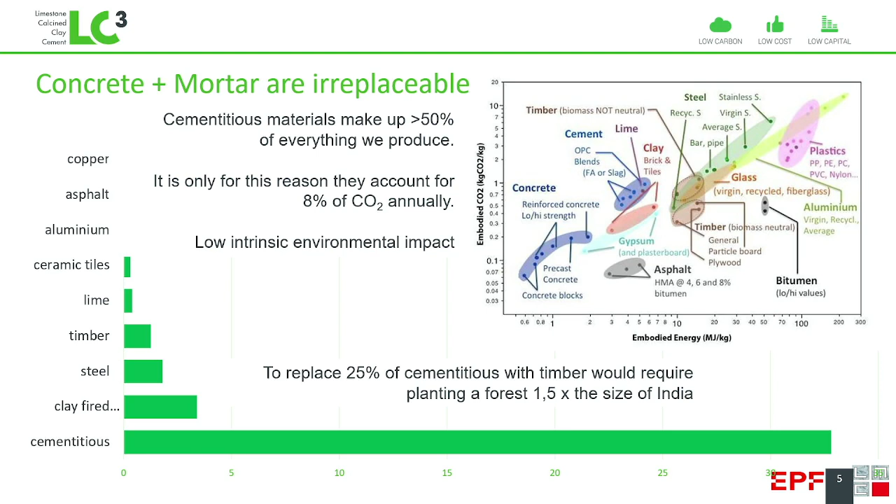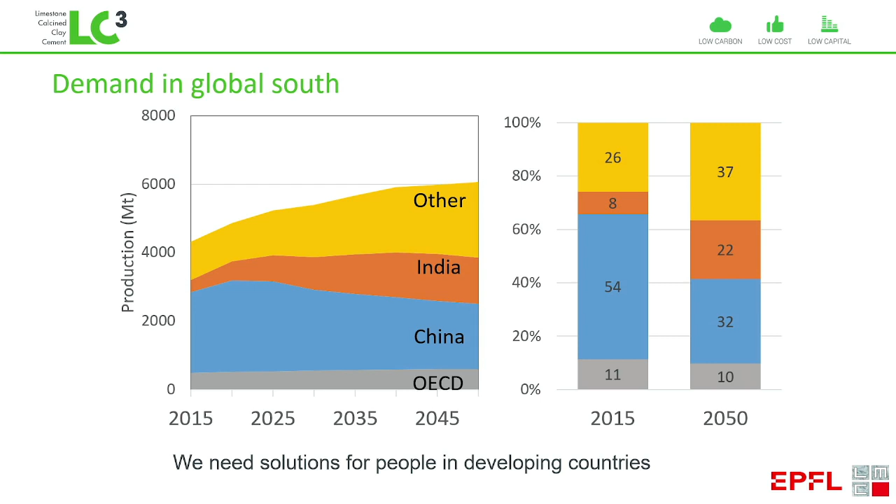Is where the demand for cement is going to be in the coming years, that this is going to be overwhelmingly in the global south. This means that we must have solutions that can be used by everybody everywhere, and not solutions that are very sophisticated that become a micro niche.

The other issue we are facing with cement is the origin of the CO2 emissions, which are coming from more than half of the emissions, about 60%, coming from this simple chemical equation, which is the breakdown of limestone, 80% of the raw material, into calcium oxide and CO2.

Now, this material we call Portland cement. We cannot really come with alternatives because the chemistry and geology of the earth means it's the only material we can produce on the scale needed.

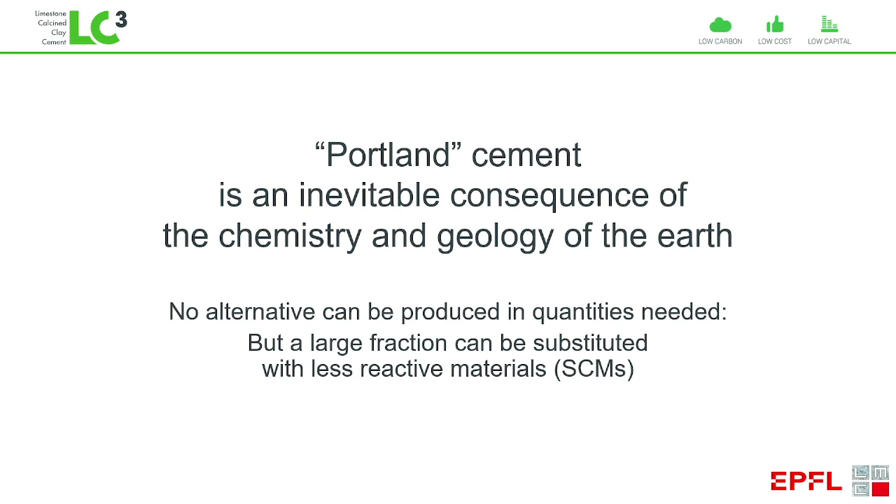But we can replace a large fraction of this Portland cement by other materials, and this has been done very successfully over a few decades now. But the issue is that the materials we are commonly using as replacements, which are called slag and fly ash, the amounts available are really quite limited compared to the demand for Portland cement. And these materials' amounts will decrease in the future because they're coming from very CO2 intensive industries.

So this is where we started from, and we looked at what materials we could use as alternatives. Limestone is widely available, but the problem is it has low reactivity. And then we came to the clays. Clays can produce very reactive materials when they're what's called calcined, meaning heated in the range of about 800 degrees.

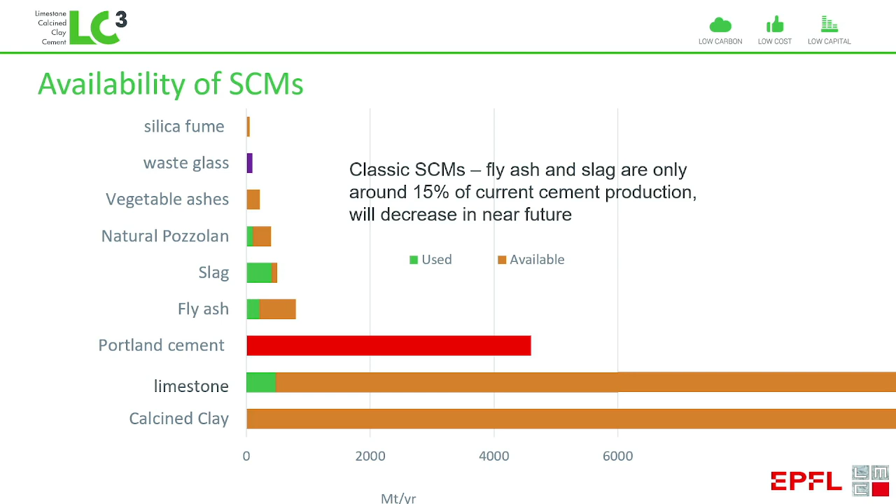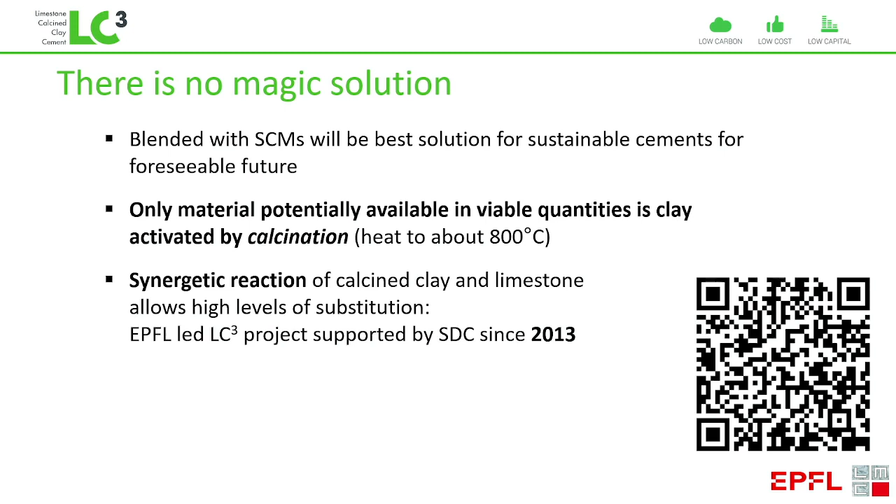So in a nutshell, blended cements will be the most viable option for the future, and the only material which can extend this use of blended cement is calcined clay. Our discovery at EPFL was that we could have a synergistic reaction between limestone and calcined clay, which allows us to go to very high levels of substitution. We discovered this about 2008, and since 2013 we have been supported by the Swiss government through their Agency for Development and Cooperation to bring this technology to the industry.

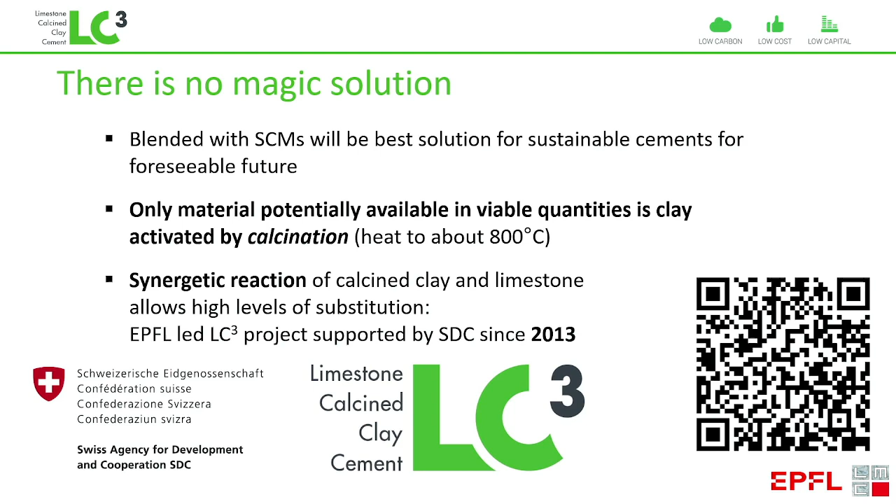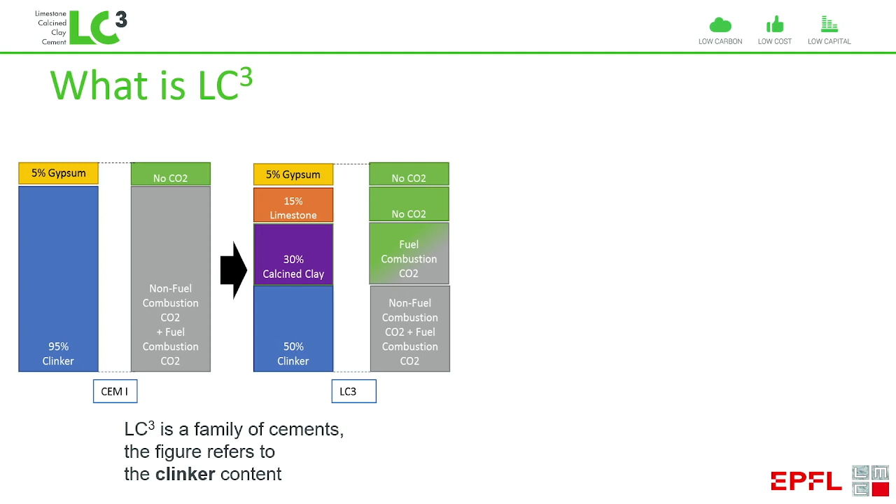So in a nutshell, this is why we can reduce CO2. On the left there, we have conventional clinker, which is producing a lot of CO2. In LC3, we can replace at least 50% of that clinker by other materials. We replace about 30% with calcined clay, which has a little bit of energy for calcination, but much, much lower than clinker. And then the other part by limestone and gypsum, which have no CO2.

And what's really interesting is the fact that with this material, we can obtain the same or higher strength than the reference Portland cement in as little as 7 days. So in a nutshell, we have 50% less clinker, 40% less CO2, and some properties like resistance to chloride ingress and alkali silica are immensely improved.

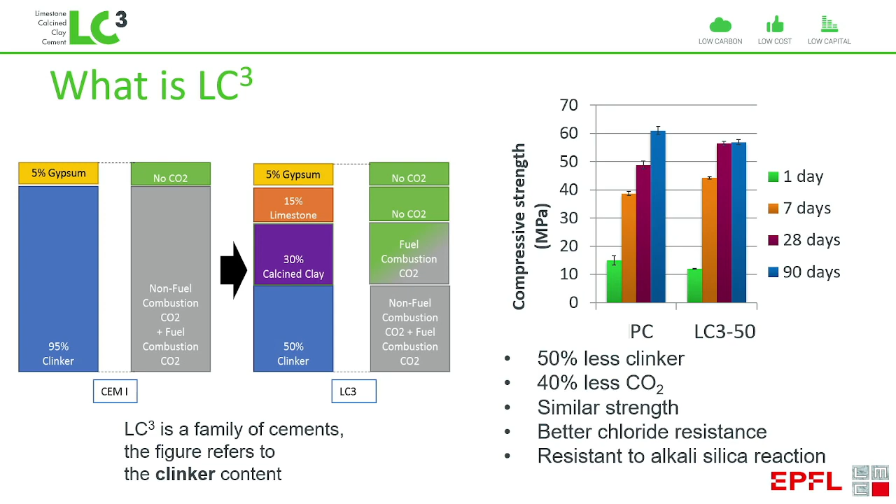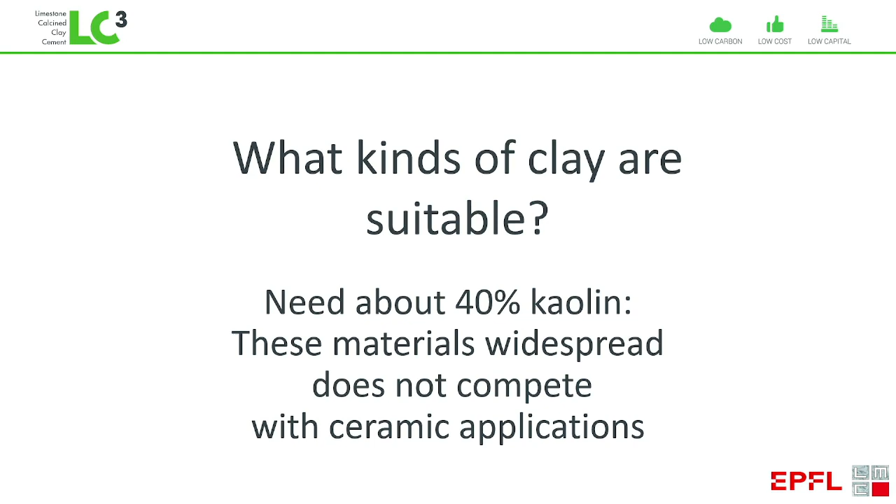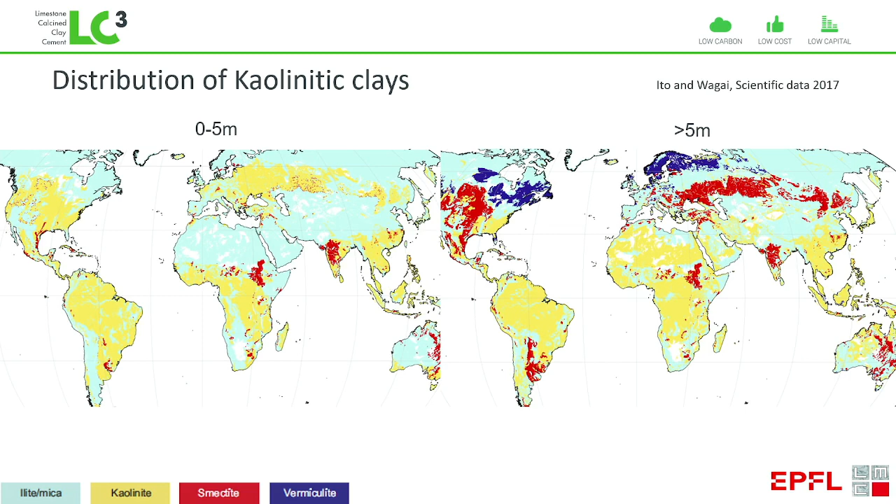So our first issue was to find the right kind of clay. We don't need very high purity materials. We can use materials with just around 40% kaolin, and these materials are very widely distributed worldwide. Everywhere you can see this kind of yellow color, you will have suitable materials for making this calcined clay. This is particularly good in the developing countries where the demand will be strongest in the coming decades, but also in Europe we have some quite good areas.

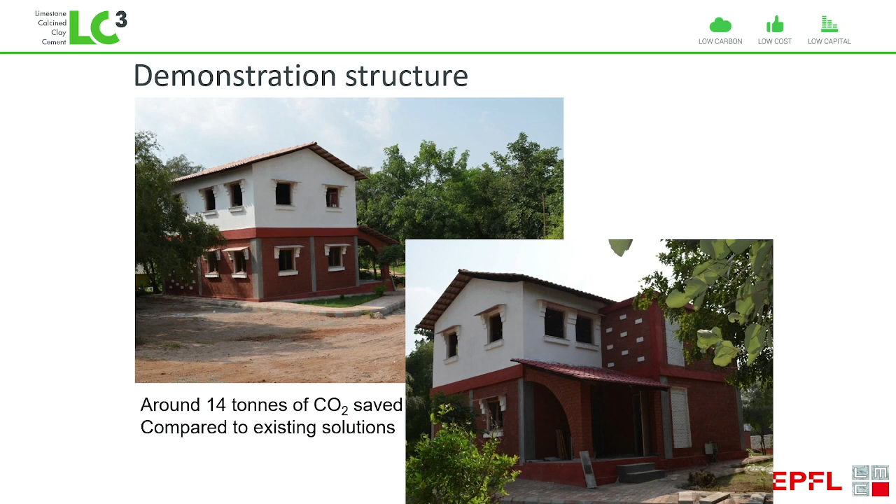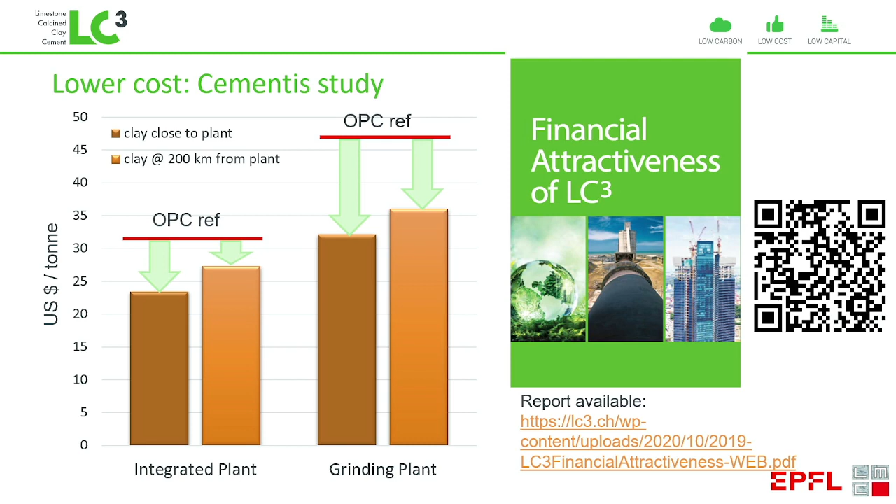From a financial point of view, it's also very good news, because you can save costs. And while we're all trying to promote CO2 savings, I think for industry, the real winner is if you can say that you can produce this more cheaply. This will be the real driver for the uptake. Of course, there is some barrier in terms of installing new equipment, but this also is relatively low in this field. So the potential for this technology is really enormous.

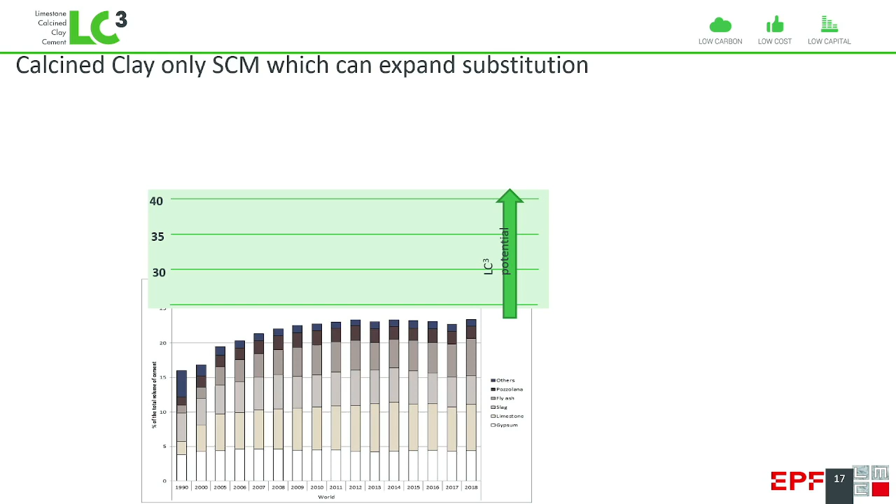This graph here shows the current average levels of substitution worldwide, and it has stagnated in the past decade to around 20% because of shortages of slag and fly ash. If we remove that obstacle, which we can easily do by calcined clay, it's generally agreed we could go to substitution levels of at least 40%. This would represent a saving of over 400 million tons of CO2 per year.

And I think on a horizon of 2050, it would be imaginable to go to 55% substitution, which would be double that. And this is like 1 to 2% of the entire CO2 emissions of the world today. So a very substantial saving from one single technology.

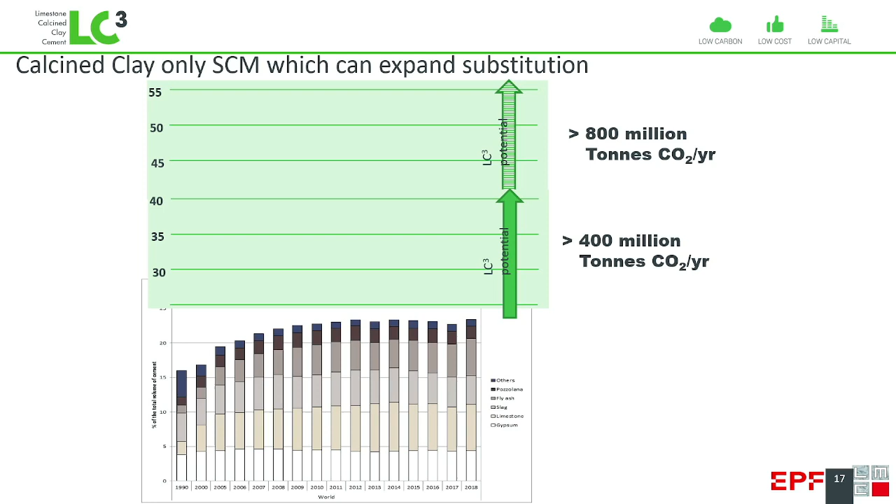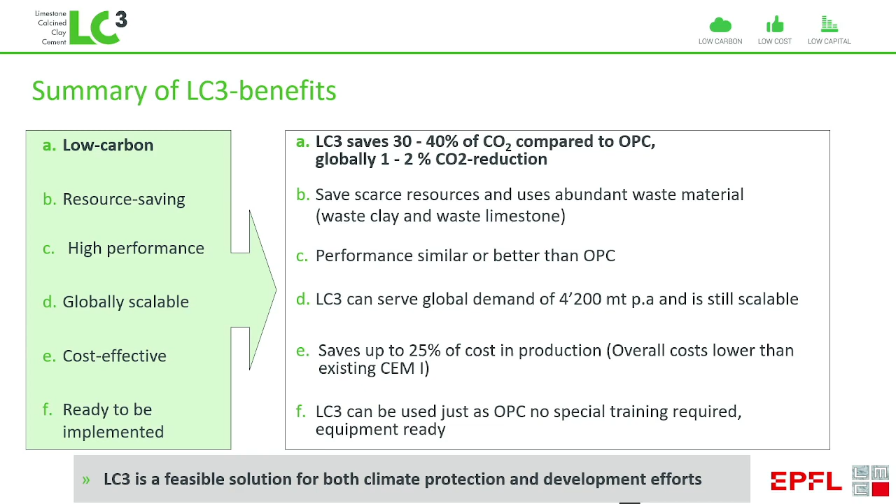So in a nutshell, these are the advantages. We save carbon, we can use otherwise waste resources, we have performance which is very similar to the reference, we can totally scale this up. We can save up to 25% of production costs, and it can be used immediately just as the conventional OPC with no special training. So from this point of view, it's a feasible solution for both climate protection and development.

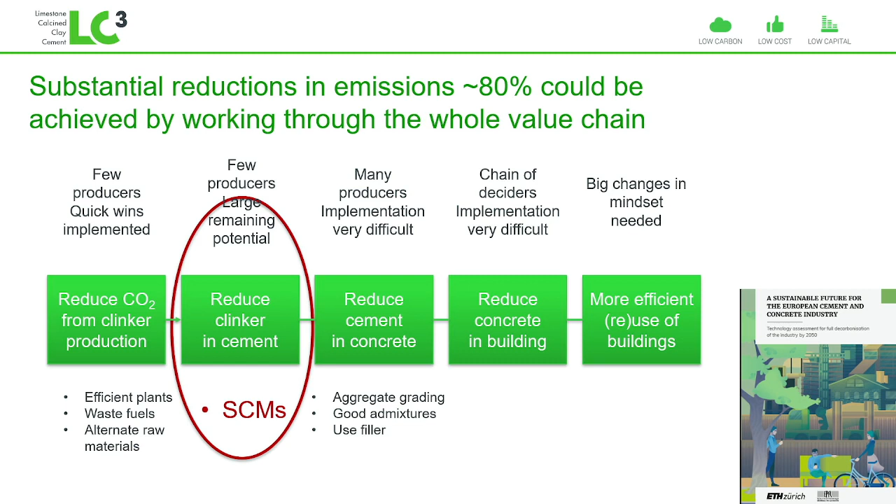It's not going to be enough. If we really want to decarbonize cement, we have to be able to move right through the value chain, not only reduce clinker in cement, as I've been talking about with LC3, but cement in concrete, concrete in buildings. But I think if we really develop these aspects, there can be savings even up to 80% of the emissions today.

So with that, I'd like to thank you, and just to summarize, we can really make a lot of reductions on what is coming from cement and concrete by working at the different levels, by using LC3 at the cement level, but also working on reduction at concrete and building levels. And these are technologies available today which can be introduced at large scale and fast. So this is what we have to do.

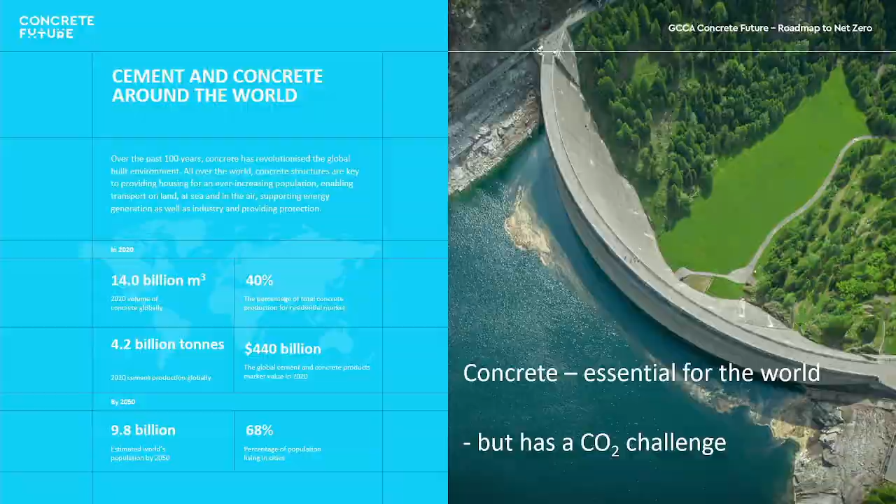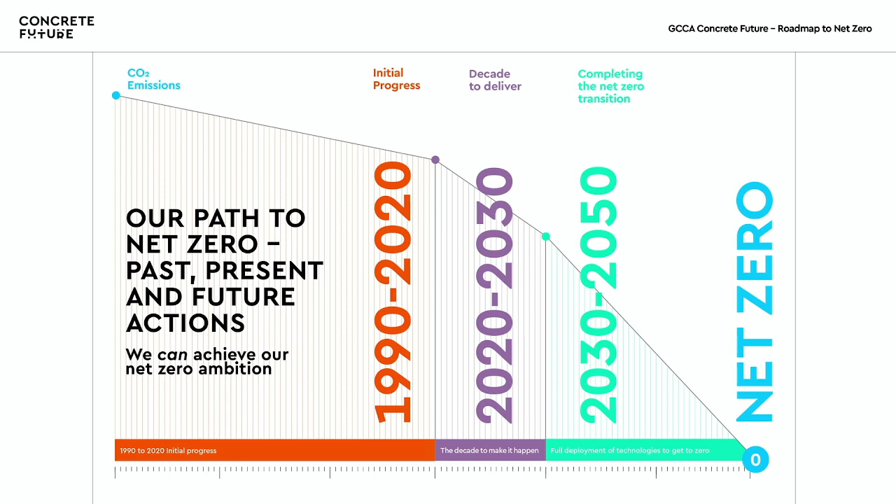So we do have a roadmap. We published in 2021, for the last COP actually, a net zero roadmap, which consists of first multiplying what we have been doing, and then working this decade, 2020-2030, on technology, on innovation, and on progressing the things that we have been doing well so far, including circularity, including different elements. I'm going to come back to that.

But what is important here is actually the acceleration that we want to do, in particular on the different levers for decarbonization. So you have here the various levers. I will not go into details. The first one is about construction. How do we build? Thinking of construction as a whole, and making sure that we are efficient, putting CO2 consumption at the heart of the way we design houses, at the heart of the way we design buildings and infrastructure.

We also have, that's the second lever in green, 11% progress to make in the way we use the powder. So basically that's how much cement in concrete, and that's an important part. And then you have this pink-orange lever here, which is the usage of cement. And that's where the CO2 kicks in, and that's where LC3 kicks in. So this is about how much clinker, which is the heavy CO2 component, we put into the cement.

And Karen expressed it very well. It's a question of how much we can save. Karen always tells me that 9% doesn't look like a lot at the global level. Well, that's because China is already quite advanced in low carbon concrete, or actually low clinker factor concrete, and therefore it weighs a little bit on the rest of the world. If we take the world outside China, that would be closer to 20 points of a lever. So it's a really important lever for the world outside China. I would say also in China. China will make progress and will use it, but it's particularly important for the world outside China.

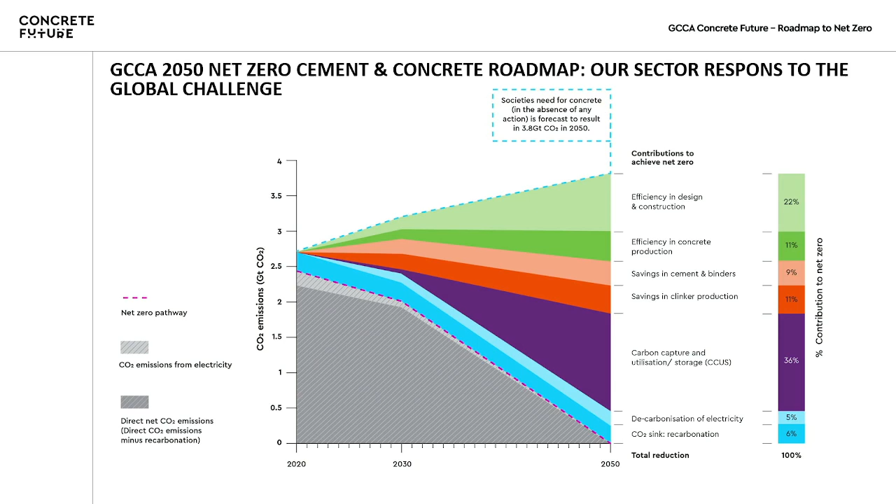Now, if I drill down a little on this 9%, why it's really important. It's fundamental because today, Karen said it also, there is a disappearance of slag and fly ash. These are byproducts from industries that will go into decarbonization as well. So they will fade out and the amount of material available will reduce.

There will be less and less electricity produced with coal, that's what we hope. And there will be less and less crude steel produced in the world. So the availability of this material will reduce. And in fact, calcined clay is really the alternative, and one of the options that makes us believe that this roadmap is sensible, and that we actually have an option to these materials. They won't be over, but they will, in general, be in lower availability.

And the beauty of calcined clay is really the availability at the global level, and in particular in the global south, where the growth of the cement is expected to happen. So you see the famous clinker factor. We are today around 63%. We plan to bring it down to 58 by 2030 and then to 52 by 2050. This is related to the number that Karen gave earlier, the famous 40% replacement in cement on 55 in cement. So we are more or less consistent, although not having done it together fully.

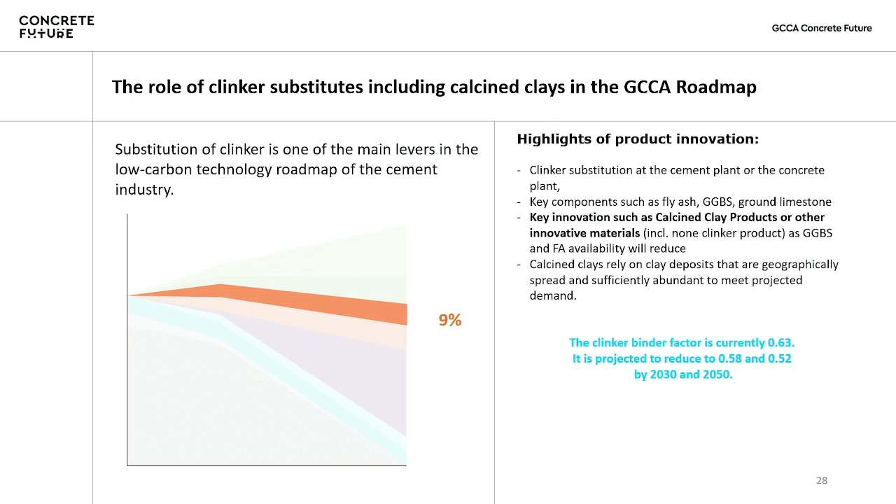So what is calcined clay and how is the popularity of calcined clay developing? Well, actually, as I was saying, it's something that is actually easier to make than clinker in some ways. It's actually less energy consuming. And you need to find the clay deposit. And these clay deposits, as we said, are largely available. Fundamentally, we have tested and we have proven that this material is acceptable in most of the places of the world, in all of the places of the world.

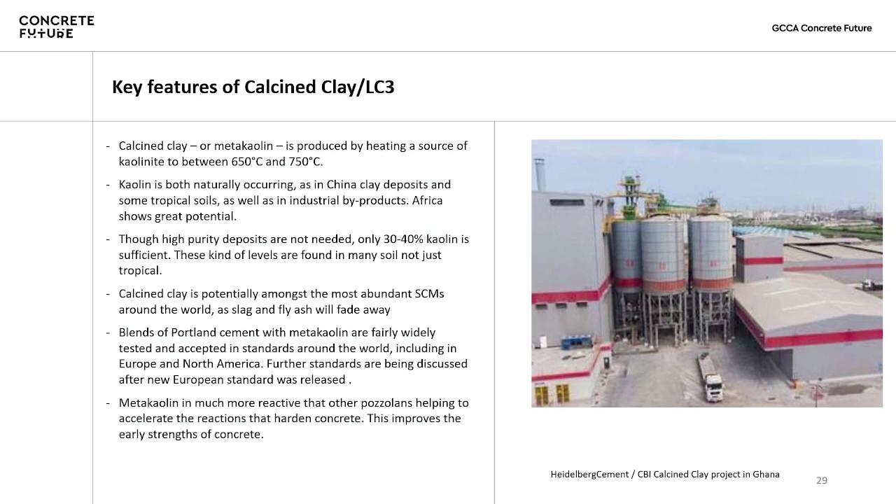We are working on standards with the industry. This is part of our policy ask to adapt the standard in the country to make place for this material, for this calcined clay cement. The latest one was in Europe, where the cement standard was adapted, thanks to the cement industry that pushed to make it happen.

A short map of the latest development, and I think we have here Magali that will tell us more about the Holcim one. But there are many projects all over the world on calcined clay that are aiming at having sizable quantities, sizable investment on calcined clay and on the development. So really for us, as an industry, this technology is a fundamental technology. It's a very important pillar of the decarbonization strategies. All our members are really committed to its development. That's just one example. We have to continue and we'll keep tracking the projects and report on these projects together with Karen in all transparency.

And Karen, on behalf of the industry, I would very much like to thank you for all the effort you have made during many years to develop these technologies and to make them available for the industry. So really, it's important to say it. Thank you very much.

I give the word to Magali. The lady in purple doing CCUS. So, no, I don't have slides. Good morning, everybody. I'm really, really happy to be here. And I'm extremely excited to be sharing a panel with such distinguished panelists. And as Thomas just said, really, Karen for me is a bit of a goddess because of how much she has made the industry progress. And of course, thank you to the Swiss government for putting that so strongly on the agenda.

Largely, our research shows that around in Africa in 2020, total cement production is in the range of 200 to 215 million tons. It is expected to grow at a rate of something like 2.6% on a compound annual basis.

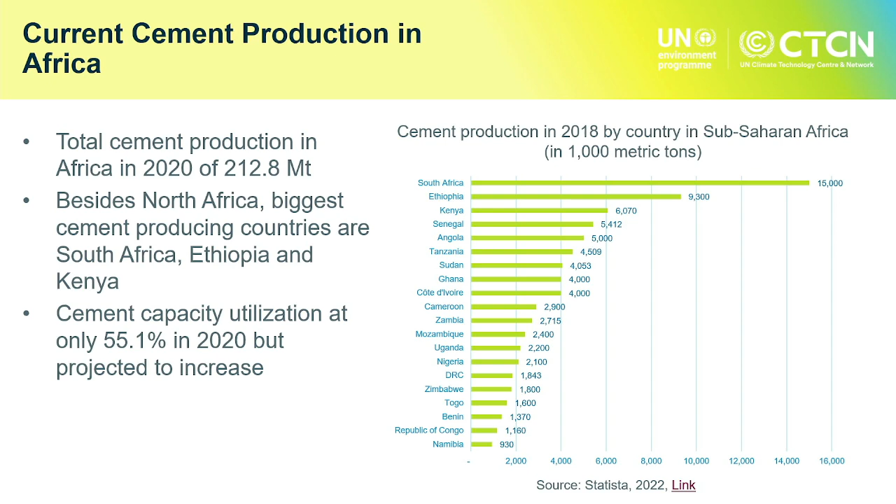The North African countries are the biggest producers as of now, but also it has to be realized that most of these cement plants have a capacity utilization still at 50%, or still in the range of 55 to 60%. It means they have the capacity with the same plant to produce more. Urbanization is happening, and there is large infrastructure development, so definitely the demand for cement is going to increase day by day.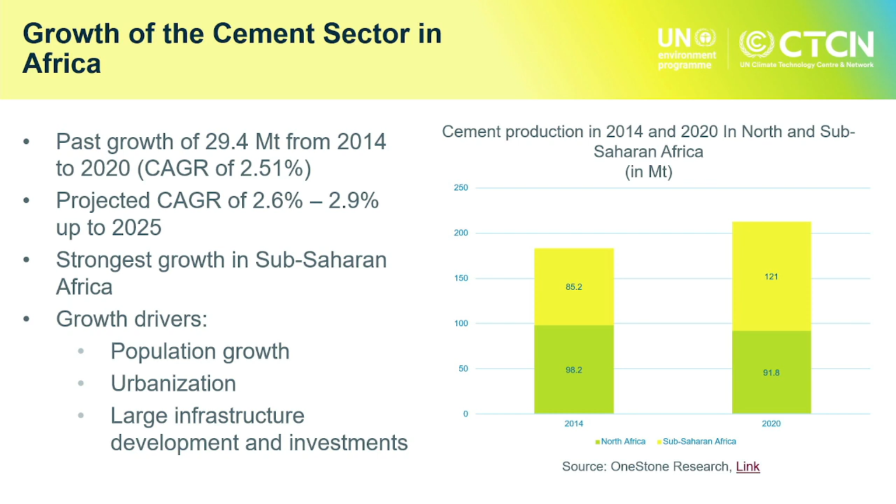A bit about CTCN: we are a body under the technology mechanism of the UNFCCC.

We have national designated entities or focal points which are appointed by the respective government in each developing country, and we work through them and support them on their demand.

Anything related to technology issues or technology transfer through technical assistance, which are small in value, but they are demand driven. So if the countries want support on technology X, we provide support on technology X. If the countries say they want support on technology Y, we say okay, why not X, why Y, and guide countries in accessing finance for technology transfer issues.

We ourselves do not have a large resource, but we support countries with whatever resource we have through small technical assistance projects. But as everyone is talking about scaling up, there is a larger effort required even on our side to see how this can be scaled up.

The Climate Technology Center and Network has developed a new program of work which has been endorsed by the parties, and this program of work focuses on two key enablers: national systems of innovation and digitalization. And we have 5 areas where systems transformations are required in the countries.

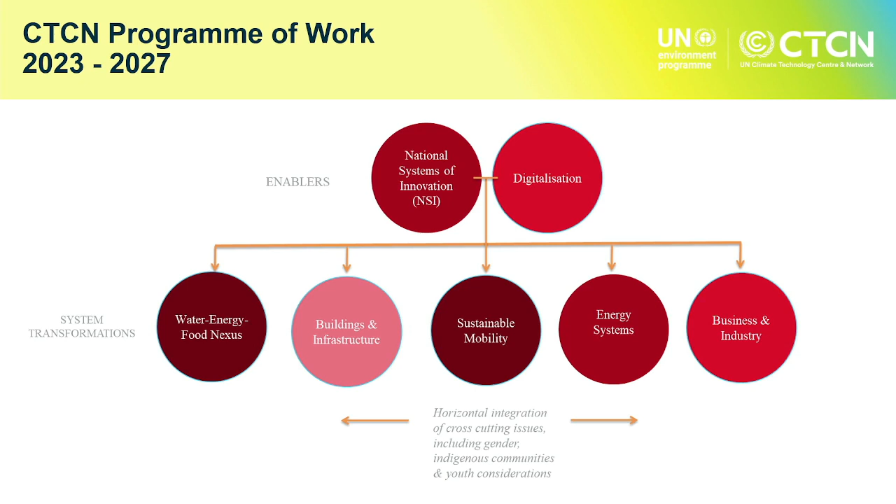Business and industry is one of it, and buildings and infrastructure is one of it. So if we look at the cement sector, these would be the primary two drivers, both building and infrastructure and business and industry, where this kind of action can be initiated.

In the cement sector, some examples of what we have done: we worked in Republic of Congo, Brazzaville, and this consisted of a general audit of technologies of the cement plant, developing concepts on how an audit can be done, the reporting guidelines, coming up with minimum specific energy consumption and how it can be improved. So it was more on the energy efficiency side, on the GHG emission reporting side.

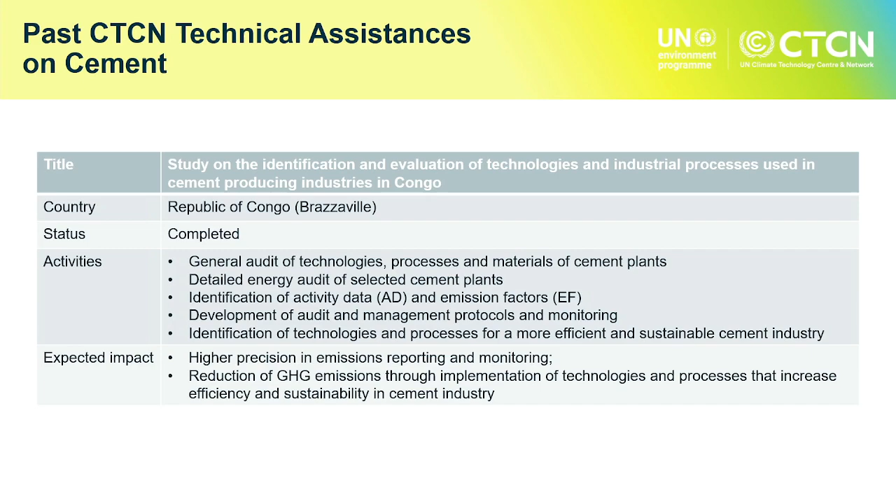Although after this, the Republic of Congo has put up an additional request which is under review on how we can take the next step.

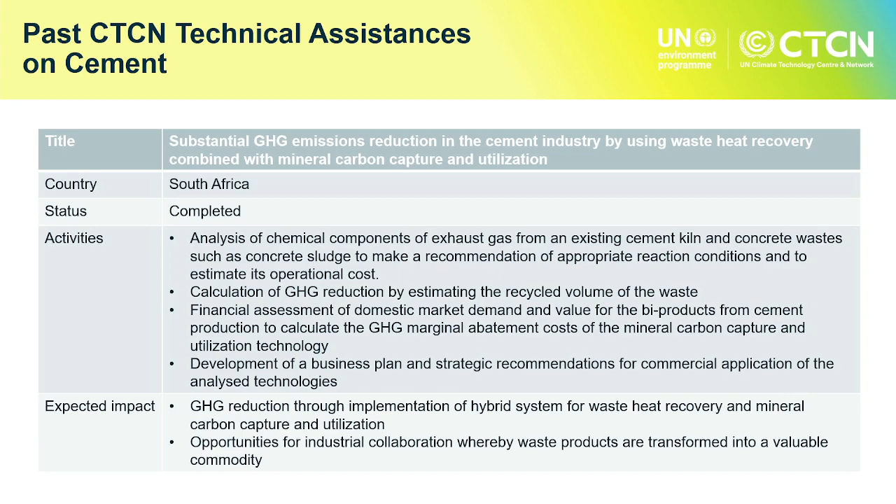We have also worked in South Africa, and there were some small talks about carbon capture and utilization. In this particular technical assistance request, which we did in the early formative years of the CTCN, we explored the feasibility of a waste heat recovery system, and we also looked at how carbon dioxide can be captured and utilized in cementitious material, so that it becomes a closed loop and closed cycle. There are some technologies related to that, and we explored to what extent it can be applied and what their feasibility is.

Again, in Mozambique, if you look at the roadmap produced by the Global Cement and Concrete Association, there are 3 or 4 elements to it, and fuel substitution is one of it. In Mozambique there is a cement plant, I think it was from Holcim if I remember correctly, where we tried to explore this.

We looked at whether using fuel derived from refuse, or refuse derived fuel, would be acceptable to the industry, how it would be used, and what the cost economics would be. We did this kind of feasibility assessment, and the results were quite astonishing.

We found that if the waste is coming from a specific area in a locality and you subject it to fuel conversion, then it was quite feasible and the economics worked out. But if it is a mixed kind of waste coming from open dumps or other localities, probably the economics did not turn out to be in favor of using refuse derived fuel. So the technology is feasible, but it also depends on where you are sourcing your refuse or waste from.

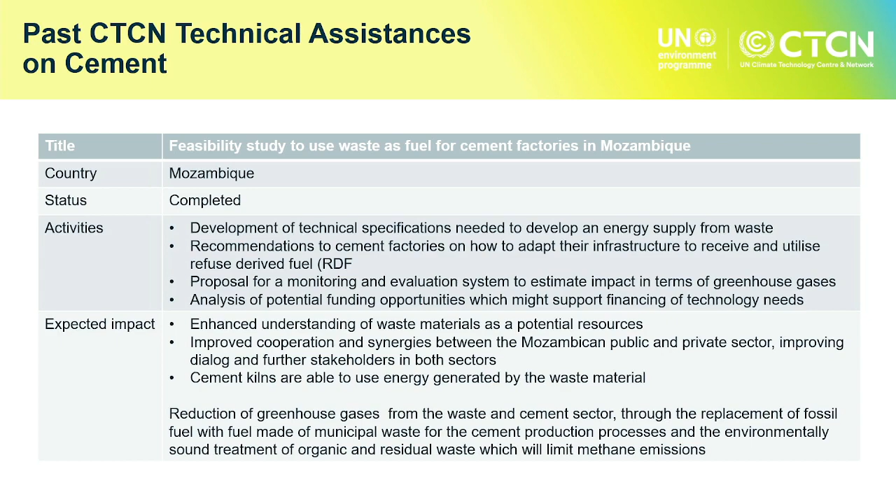So we discussed this internally. We discussed it with some of the countries, and this is a kind of approach we would like to encourage the countries to take up and come to the CTCN.

Definitely there is need for an analysis of the national cement industry, analysis of the decarbonization levers, development of a roadmap, and updating of standards.

One thing which came out in our discussion with the countries is, if we want to apply this LC3 technology, the first step the country needs to do is change their standards. They have to allow it, because countries have somewhat fixed the percentage of clinker which has to be used in a cement, rather than basing it on the strength of the cement.

Now, until and unless you change that rule, or change that standard to become more based on the strength of concrete or strength of cement, whatever you do, the industries would not be able to adopt the technology, and this is one of the biggest barriers. If you remove this barrier, with the cost economics all working out, the private sector by itself is going to lap up this technology.

So the first bottleneck is definitely updating and revising the standards, and this is what we would like to focus on in the future, or we would like the countries to request us in the future to focus on this particular aspect, because this is the real policy barrier which is kind of preventing the rapid uptake of the LC3 technology. And this is what we realized after discussing with various countries.

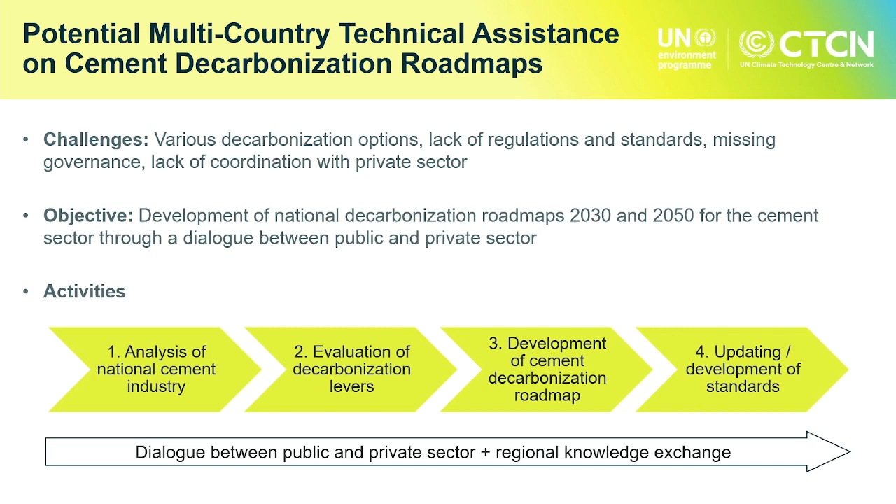So if we get a request from the countries, we are trying to direct them to look at what their standards are, how we can remove it, what they need to remove it. Definitely there also you need some technical studies, you need to convince them that this technology is going to work out the cost economics with them, etc. So this is what the CTCN is focusing on, would like to focus on.

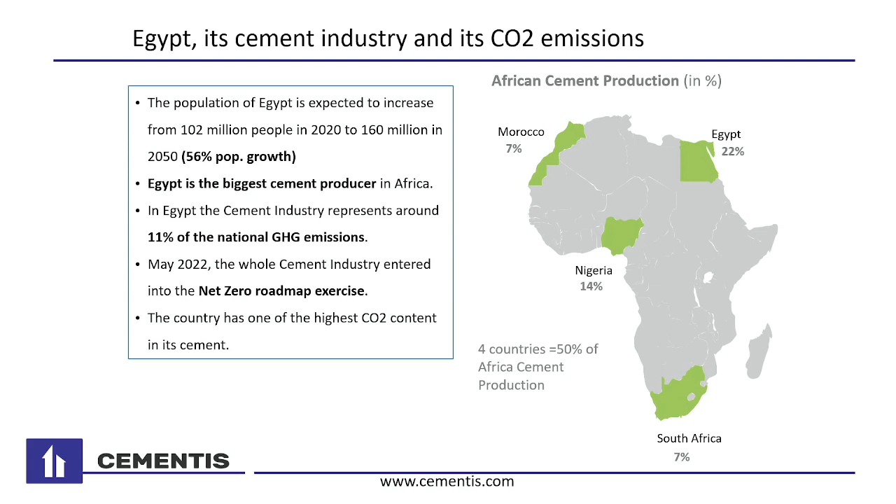But there's a but. Today, in the country, they have the highest CO2 content in their cement, which means they have a clinker factor of 89%. And that was one of the biggest issues.

You have to understand that in Egypt, you don't have fly ash. There is no coal power plant at all in Egypt. They don't have access to GGBFS, this slag - or a very small quantity but very bad quality. They don't have much steel production here.

What do they have left? Limestone. They have some pozzolana, but they have excellent kaolinite clay deposits, which means the possibility to reduce the clinker factor is huge. And this is one of the biggest levers that Egypt has to work on.

What does that mean? The industry already did a lot of sampling, a lot of testing. The quality is there. They tested on concrete. The strength is there.

But what is needed is, like Rajiv said, we need to change the cement standards. But not only that, we need to change the concrete code. And we need to change the building codes, which means we need to discuss down the supply chain with the industry, the concrete manufacturers, the designers, the structural engineers, and the famous consultants.

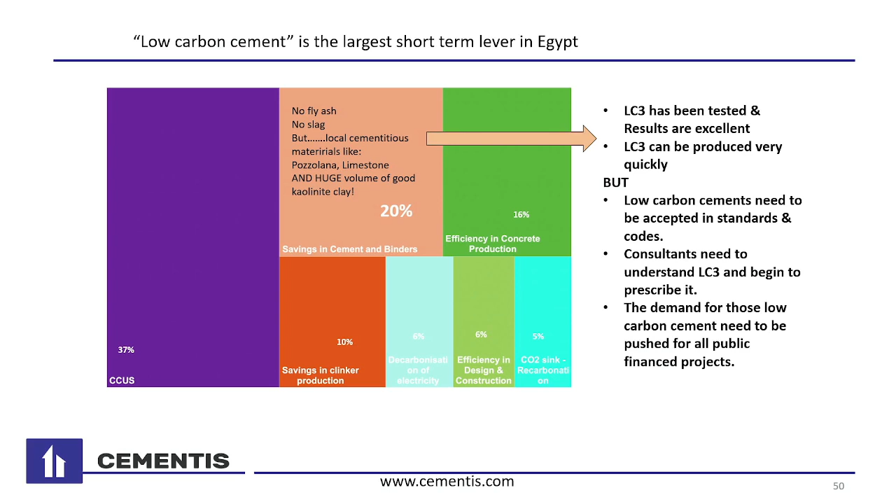And there we have in front of us different stakeholders that the industry never talks to, which are the consultants. I think we're trying to have here in Egypt a multi-stakeholder dialogue with the academics in order to bring the knowledge to the consultants and the structural designers. So that was it for me. Thank you.